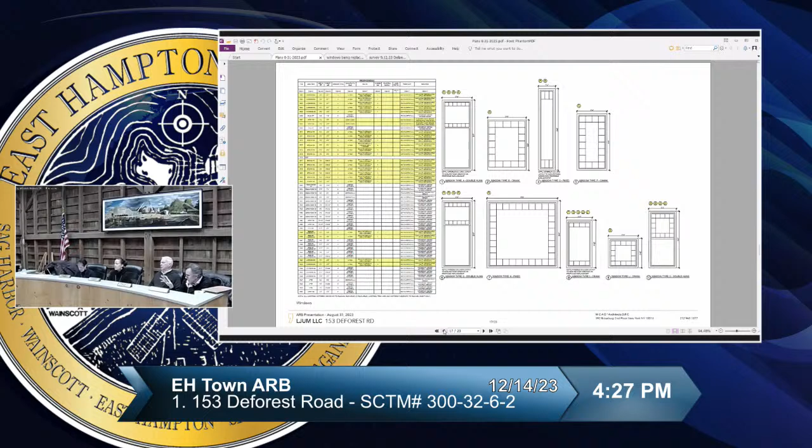Can we just see whether that's both on the McKim and White and the Fleetwood edition, or just on the Fleetwood edition? Certainly on the McKim and White ocean side - no, consistent throughout the whole. How many fixtures are there, Jim? I don't know off the top of my head. I think there's two or three on this.

Probably like 6, but they're not lights that were added - they were replacing things that had been added. Holly Hunt fixtures from Roberta Gossman, who was a New York interior designer.

I have to say the light fixtures are a little bit, to me - everything else is so compatible and fits, and the light fixtures seem to me like more of an art deco somehow element.

I went to Circa in Southampton the other day, which is now called something else, but it's the same company. You can count on your fingers how many historically looking light fixtures are in this huge showroom - they're all like this. You can go online and I'm sure find historic light fixtures, but if you look at what's available in the general marketplace, it's all gone to this more modern look.

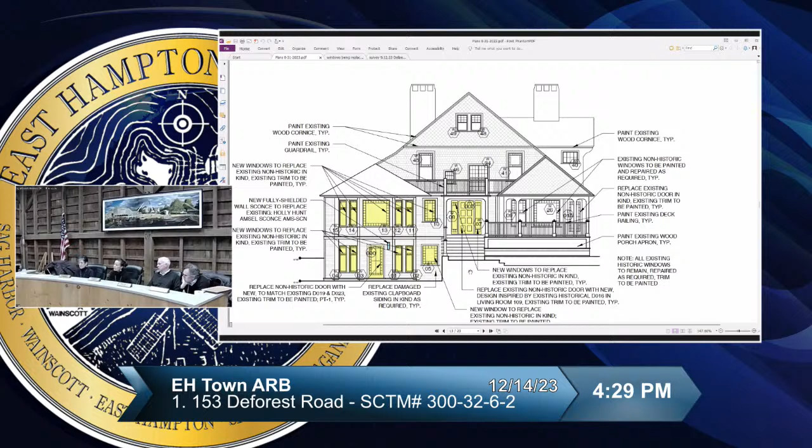And it's dark sky compliant - a normal historic light fixture will probably not be. The fixtures that were on previously, I wish we had photographs, but probably, I'm not sure. I think we could get a photograph.

They were pretty much almost identical. They were made by Roy. We've just said that they were pretty much the same - pre-ARB approval. So we're now past that. Right.

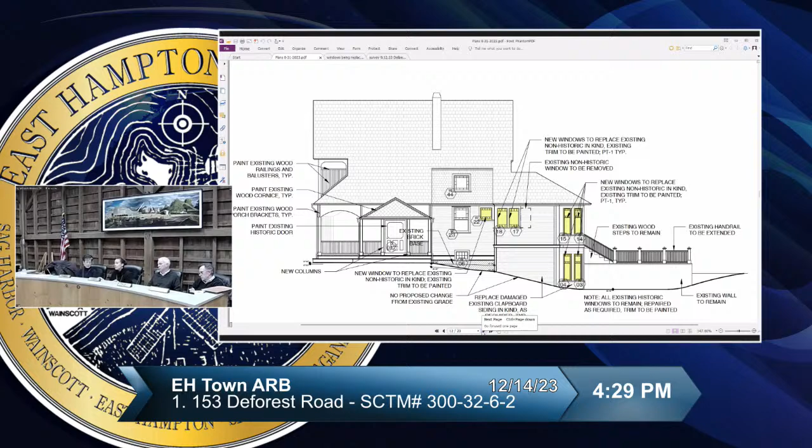Well, you also have to think about when this structure is visible, that the historic district would consider. It's usually not at night, at the end of the day. The lighting here is pretty minimal - it's not flood lighting, just basically accent lighting that allows entrance to the house. I think it's discreet.

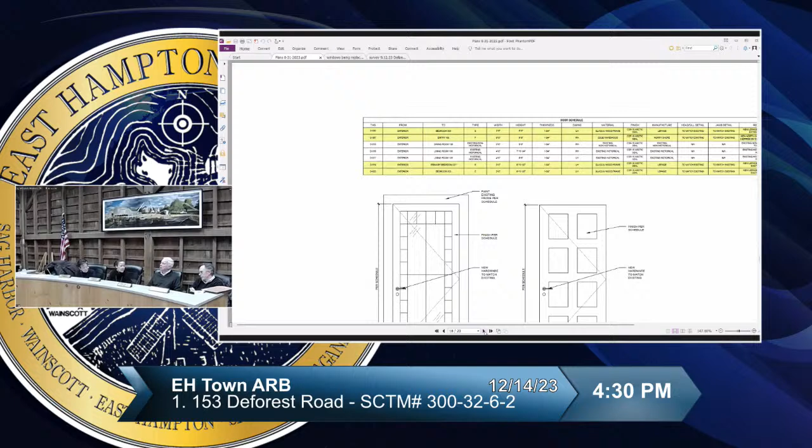I just think this is a really significant property for this town, so every detail should be accounted for. These are white fixtures - no, they're copper, they just look white. Talking about the glass? Yeah, it's frosted glass, like a copper metal with frosted glass.

Well, it's gonna be more subdued than clear glass. I don't know that clear glass could be dark sky compliant, somewhat. I agree with that, but I also kind of think, are we changing the architecture here? There's ornament and then there's architecture.

I don't want to start saying what's appropriate period-wise for a lighting fixture. I don't want to go down that path.

I don't want to get into saying I want to see something just a little bit better. I agree with the point about the frosted or etched glass, but if it's not etched, you're looking at a bare bulb - is that better, is that worse? Then we start talking about dark sky, recessed, period appropriateness.

It's one detail that could be worked on, that's all. But again, I see that point of view - we're not talking about fenestration, massing, or railings. We're talking about a very replaceable piece of ornament, so I'd be willing to give the owner some leeway on this.

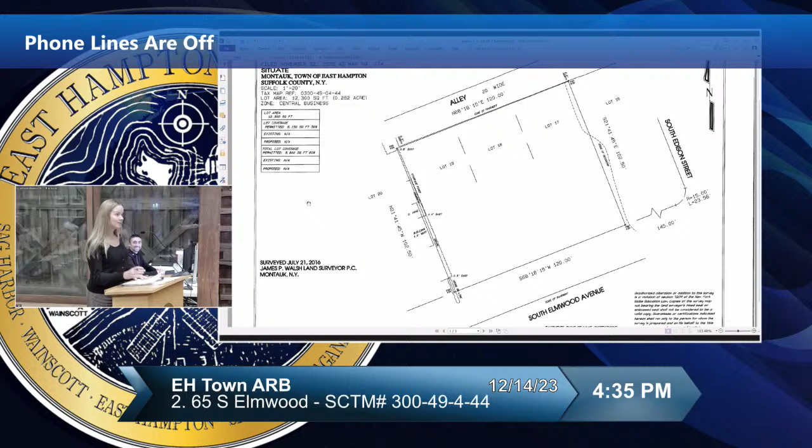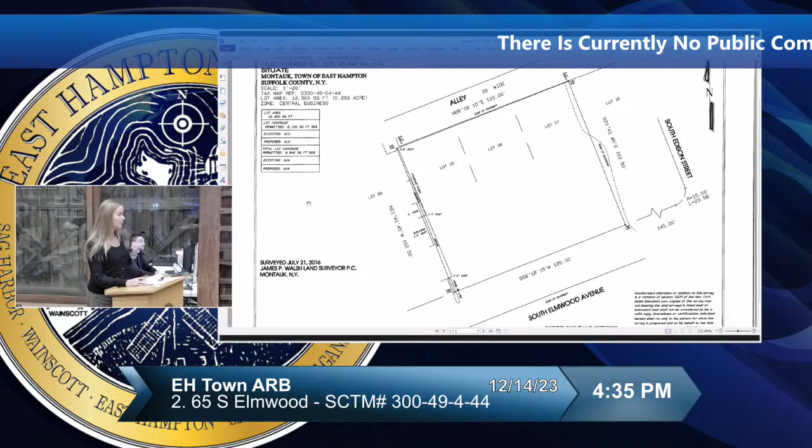As Esperanza said, it's a vacant lot in downtown Montauk, and there's an existing fence along the western property line. It's black and stockade, and it's proposed to be the natural wood fence that was just up on the screen. That's really the full extent of it. It requires site plan and architecture review board because according to the code, it is a structure, and any structure in a commercial district requires a building permit, which triggers your review and planning board review.

The only thing I wanted to add was in that last photo of the site, the planning board had requested as a condition of their approval that we depict the chain link and the posts on the survey. So the survey approved by the planning board will have that on it. If you're inclined to approve the application and want that on your survey, you can make it a condition of your approval, and I can have the same survey for both boards.

Okay, I was going to ask you that because I noticed it wasn't on the survey that I had in my packet.

That's it. I don't really have any other questions, just one actually. So I see that it connects to the adjacent building. Is that going to continue that way, or is it just the fence? Is it the same owner? It is the same owner.

Okay, and honestly, I don't know if they're going to connect it or not. If they are, then we'd have to come to the ARB for that section on the neighboring property. Okay, I see. So can you maybe point out where the property for this empty lot stops and the one next to it starts? Is it in the middle of that fencing?

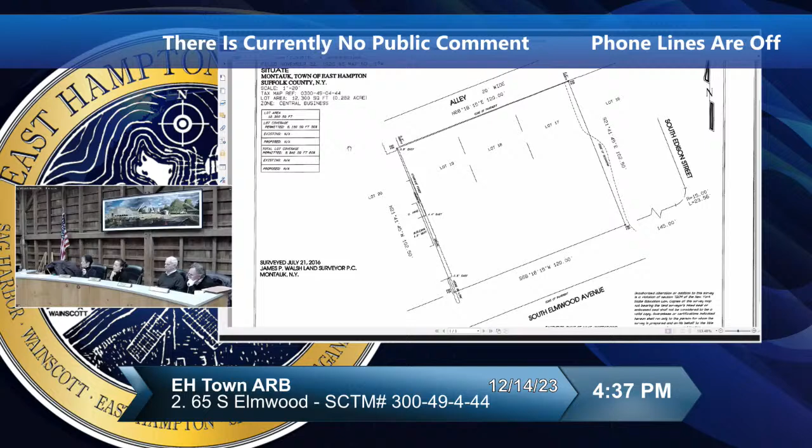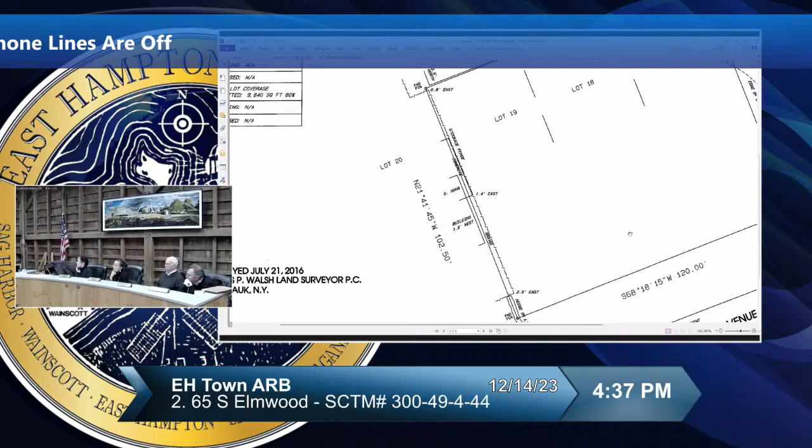It's right, the fence is right on the property line. And then the part that goes in and touches the Montauk Beach House, you can see it here. So it's just inside the property line. It'll come across to right there, just how it is now. And then if we need to replace any fencing on this property, we'll come in for that one.

But do we know that from the photograph? It was just hard to tell from that photograph where, but the dimensions are the same, so it's right about there. And it's the same owner, you said? Well, essentially, it's two different LLCs, but yeah, it's essentially the same owner. And really, the fence is just there to shield the other property.

Okay, could you zoom into this portion? So I thought that your fence went to that corner, and then the solid vertical board fence was the neighboring Montauk Beach House property. Is that accurate? Well, on the survey, it shows as cutting across, so I would say that's not accurate.

Okay, that's what I just understood from what you said, so I just wanted to double check. So essentially right now, we would be approving just the section that is stockade fence. There's another picture we can look at that I think shows it from the east. The whole fence is going to be replaced.

But that portion that was just facing us, that's vertical board, is going to stay that way? The front portion, yes, the front facade, that's going to stay. The portion that's going in between the two properties, the one that depicts the property line essentially, but slightly inside of it, is the one that's changed, the one in sunlight right now.

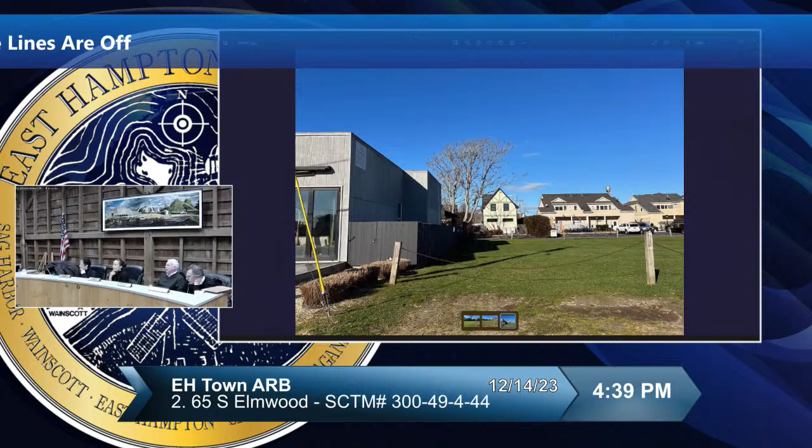I was concerned about the joiner, basically. It joins the property line to a building. It's the one in between the properties that's in a state of disrepair that they want to replace. Right, seems fine to me.

And it's not being painted. It's going to be natural, it's just going to weather. Seems fine to me. In the world of fencing, what they're proposing is an improvement, more expensive than a stockade fence.

Okay, if there's nothing further, I'll make a motion to approve the application as submitted. Can I have a second? Second. All in favor? Aye. Aye. Great, thank you.

Okay, moving on to Marram Montauk, tax map number 300-49-6-26, 21 Ocean View Terrace, Montauk. This is another one I went out to visit, and this is land planning?

This one took me a minute to locate the area the application was referring to, but I found it, facing south toward the ocean in this hotel complex. This is a guest lounge area.

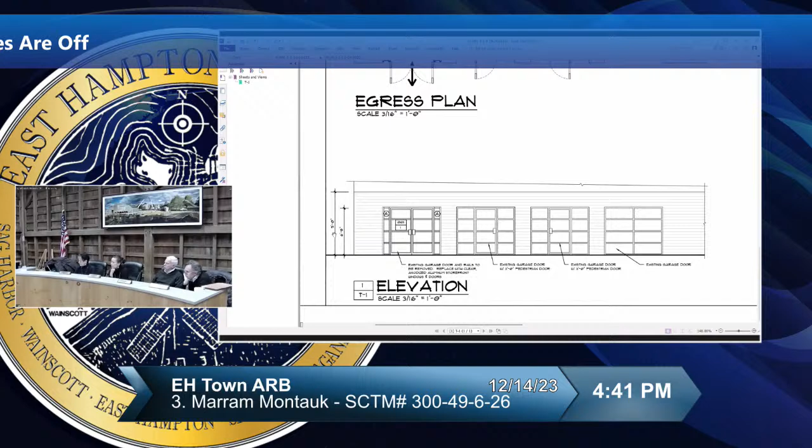I was a little confused because I was seeing storefront windows, but these don't look like necessarily store windows to me. It looks like glass doors with side lights or something like that. So it's basically a door, yes, with fixed panels on either side.

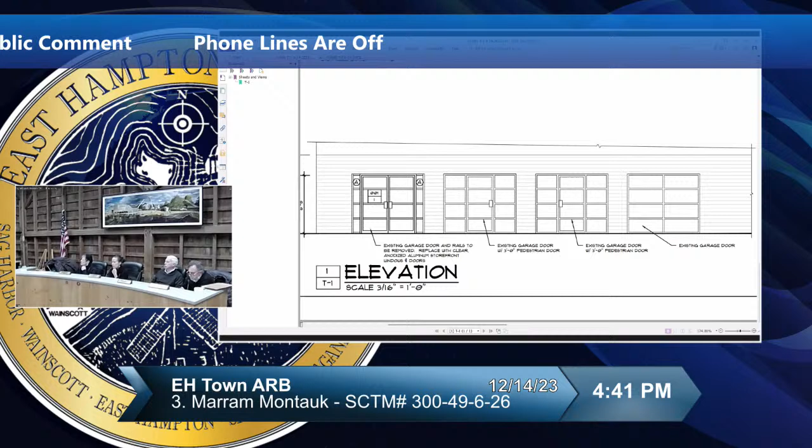And so it's going to mimic the look of the other doors. Yeah, it's just a little different, obviously, because of the side lights, just the design. It's going in the same fashion, proposed in the same style.

And it's just a means of egress. I guess they want to improve the egress for the guest lounge. The guest lounge is something that's with the planning board. Well, this indicated it was a guest lounge. Anyway, we're just here for the garage doors. I'm not reviewing the interior or the use, I'm just saying it appears to be something that improves the egress.

So, any questions? Where is this facing? South, toward the ocean, this courtyard. You can see the pool. Can you see it from the beach? Not really. I have a picture to show. My question is really, can you see it from the public area? There, just behind that wall of the pool, is this area we were looking at. It's pretty hard to see. Yeah, it's sunken.

This is the same window and door manufacturer with the same dimensions of the horizontal and vertical members. Just curious, I'm a newbie, so please be gentle with me. Daniel, maybe put back the elevations in that sheet, which has the specifications. That's correct, I mean, it seems fine to me.

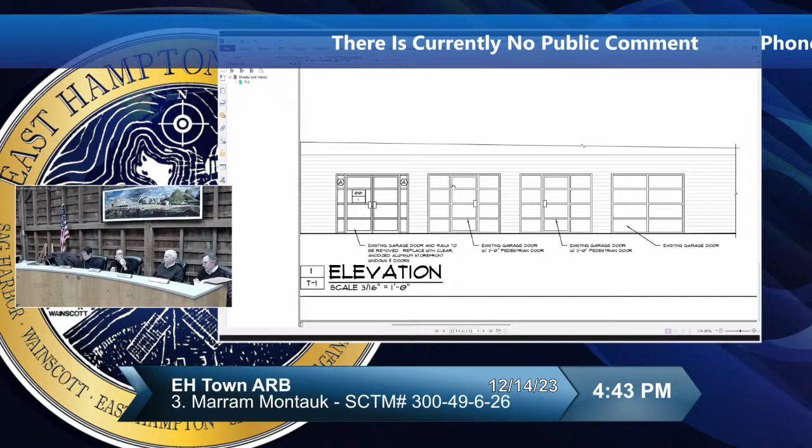The only thing I want to make sure of is that the width of those anodized horizontal members and the door frames would be in kind to what's there now. The risk is the ones on the right are not hurricane impact rated, and then this would have to be beefier and they wouldn't match. So as long as it matches. Okay, I'll make sure that happens.

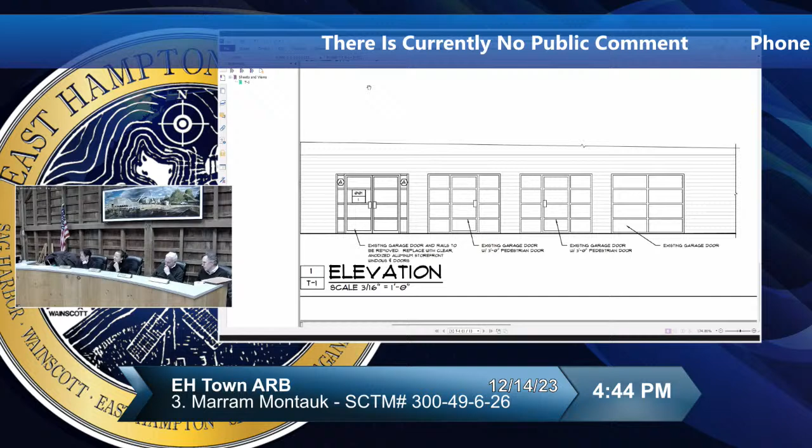Okay, you want to take a look at the specifications on this page? I think it kind of is what it is.

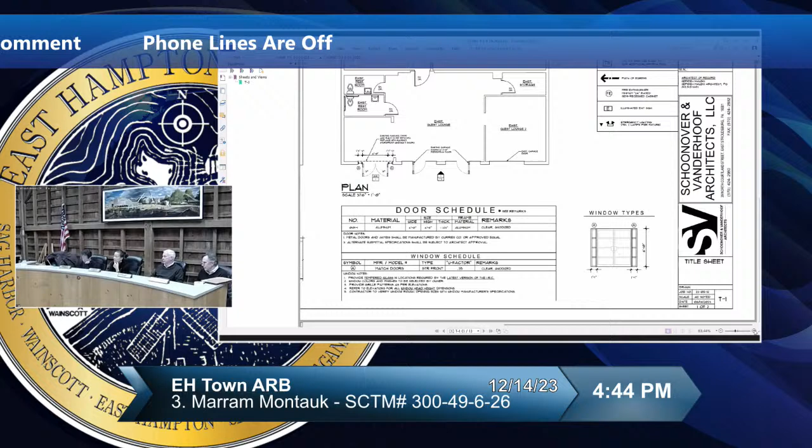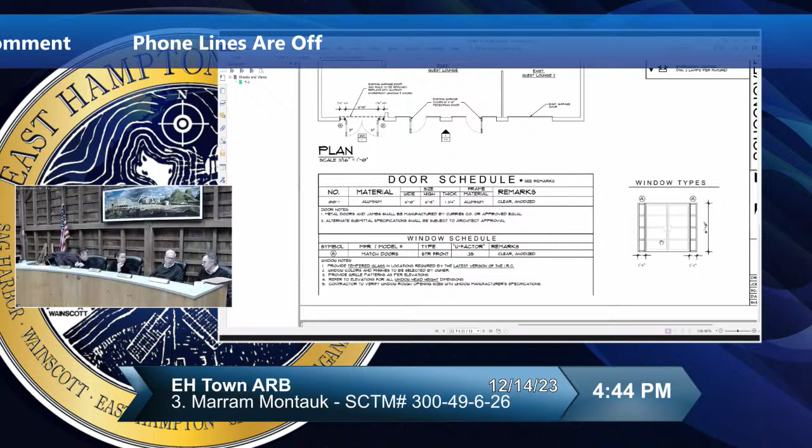It's one of those things you have to leave to the faith of the architect to get the detailing right. I don't typically see that we'd say it matches in kind in terms of materials, but the dimensions - the fenestration lines, widths - have to match up. The profiles should match in dimension. We don't want them to be thicker.

Yeah, I understand what you're saying. But I also understand that sometimes the manufacturer says it's not really available these days, so it's like half an inch less, and then they go back to us. How do you handle that?

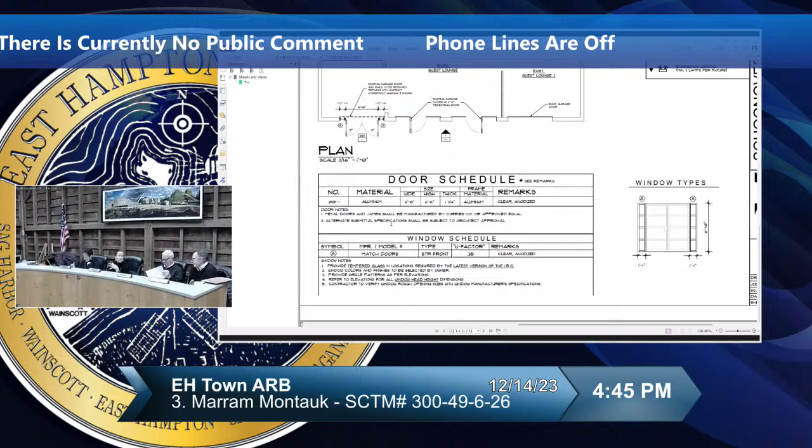Well, I'm willing to approve. It seems like a very well-maintained property, and I think they're going to be careful with that. So I'd be fine approving it in kind.

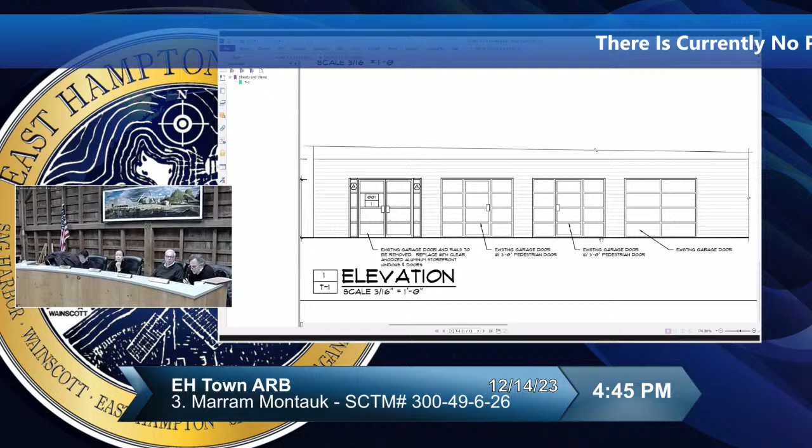Diane, anything else? Okay, all right, so I'll make a motion to approve this application as submitted. Did you want me to make a note of that? I think it's really fine. All right, do I have a second? Second. All in favor? Okay, thank you.

Okay, we had agricultural overlay next on the agenda, and first up is Henry Beard for a modification. This is 62 Hampton Road, tax map number 300-189-4-2.1, in Amagansett. This is Diane.

Yes, hello again. Now, this project has been before us several times, and it began with three changes being made to this building. Two of the new structures have been built, and this is the existing structure. Could you go ahead with the pictures? These two - the tower is the original house, and the other two are the additions that have been built. As you can see, they very much mimic the existing house.

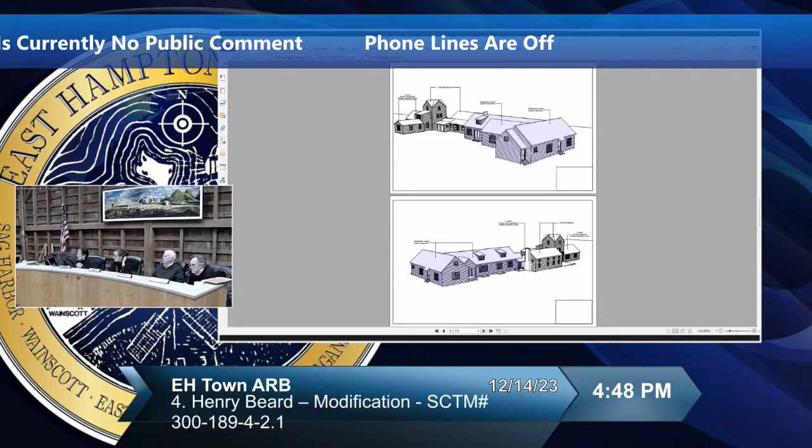Originally we had a 2-story structure back in, I think, fall of '22. We came in front of the board, and there was concern with the scale of that 2-story center portion. So we eliminated that second floor and added it as a 1-story addition off the north side. And then when we did the budget, it came in too expensive - it was a lot more square footage, a lot more construction.

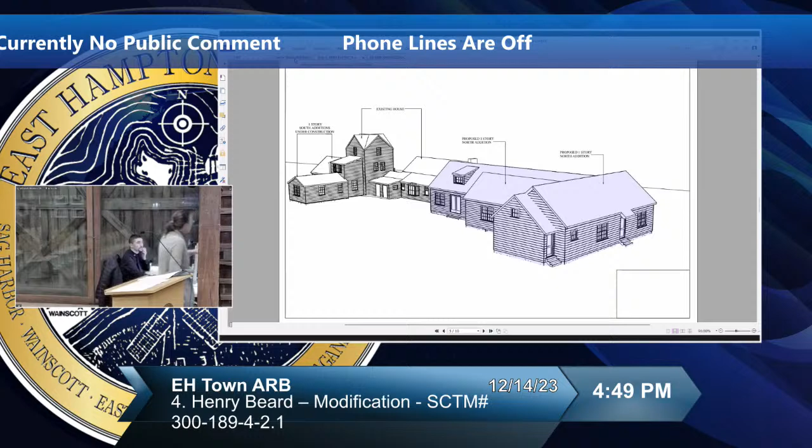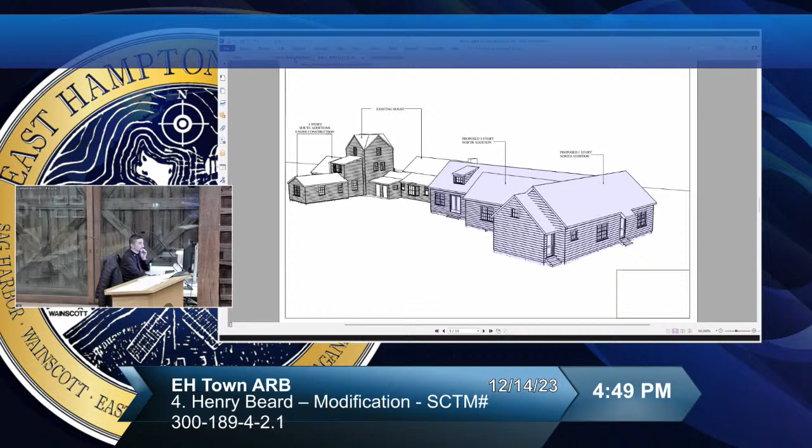So we eliminated that wing and incorporated the bump out - about an 8 by 30 bump out - into that central section, still keeping it 1 story. But we had to increase it a little bit because we had this bedroom suite we had to incorporate into the center section. So the difference is this little bump out here. Before it just came straight across, and then we had this wing that came out. So we've eliminated that, and we end up with 1 dormer in the back.

And then in the front, west elevation, we have 2 dormers. Before, originally, we had 3, because of how we rearranged the internal space.

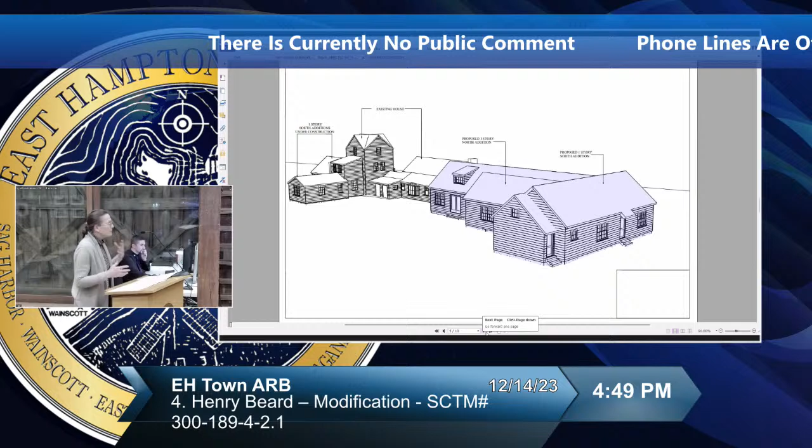Is that how it's going to look when it's finished? Oh yes, hopefully. So everything to the right is new and most everything to the left is old, except for those 2 little protrusions.

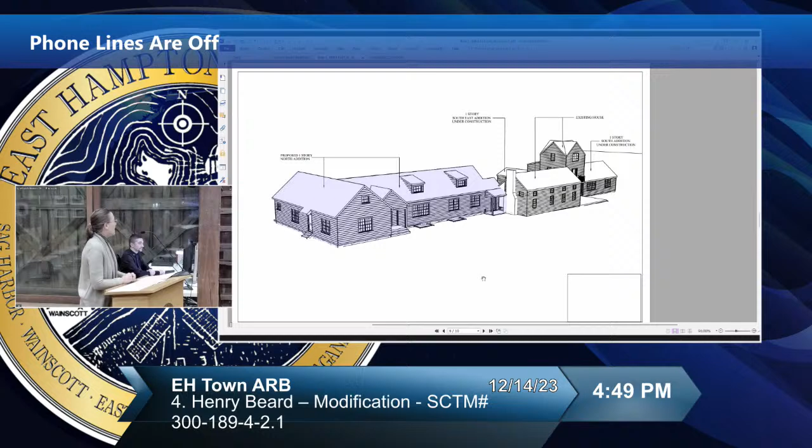This is the existing structure, and this is the tower, and these 2 one-story bedroom additions we had gotten approval for earlier, and they're built. In that wing there's a music studio and living space. Even though they've just been built, they match the house - what kind of materials?

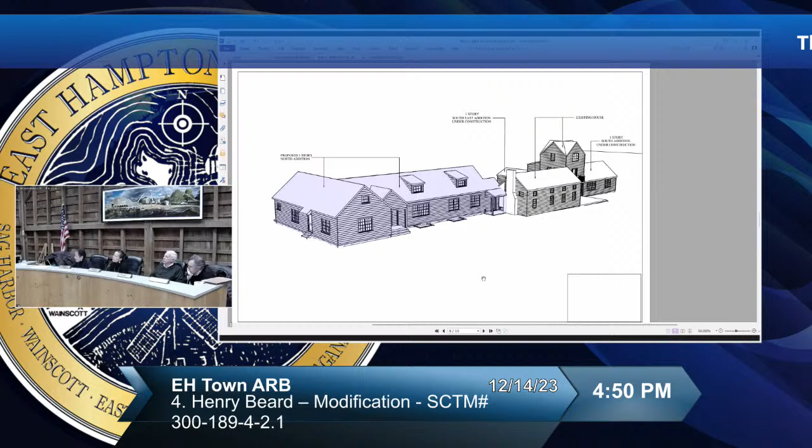Yeah, but the intention was basically to make the new part indistinguishable from the existing house. So I think that we approved something that was much bigger in scope, and now the modification is basically to decrease the space and the fenestrations, et cetera, so if you have any questions.

And that's on the other side of this, right? The bump out side? Yes, behind that central portion. Okay, right, I understand - the 8 by 30 bump out.

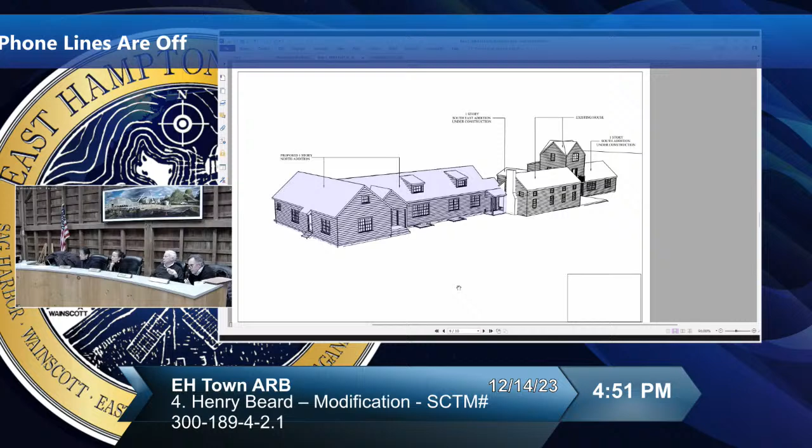I noticed one comment on the last submission was about the entry, and this one seems improved because there's more of a hierarchy now between the left being the main entrance and the right being a secondary entrance, is that correct? Yeah, that's how it reads.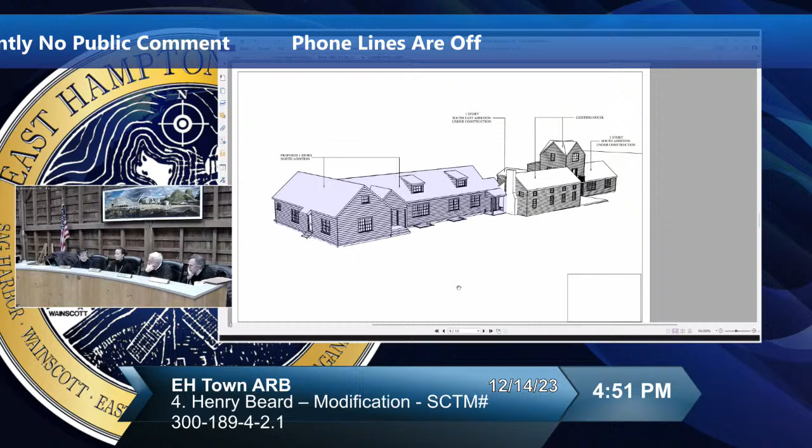It looks like a little village. I like that it's not like any other houses, and it kind of rambles on. Curious what this looks like on the site with the survey. It's a long property and the architecture follows that, it's this long house now that rambles in the direction of the site.

We were able to save a really large oak tree in the back with this new addition. That little bump out is actually a crawl space, which enabled us to preserve the tree. So they've kept the property very rural.

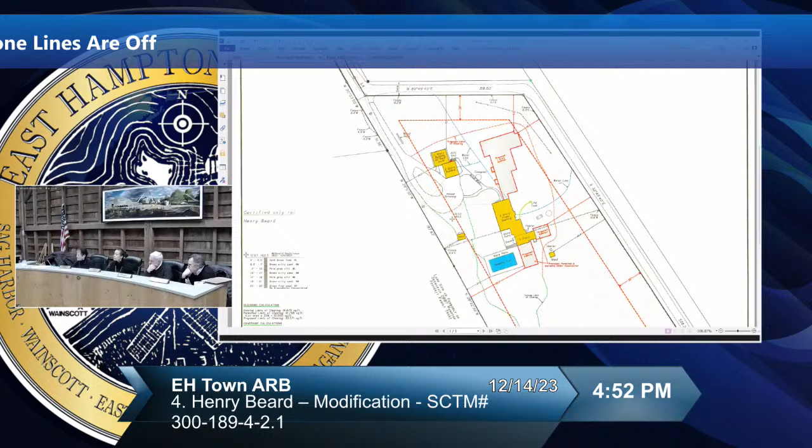It's very natural. Do we have the lighting cut sheets? You're putting sconces on it, and that was already approved, right? That's part of the submission, has that been approved? It was approved already, this is just a modification for this particular addition. So we're basically approving the massing and the fenestration. Okay, seems fine to me.

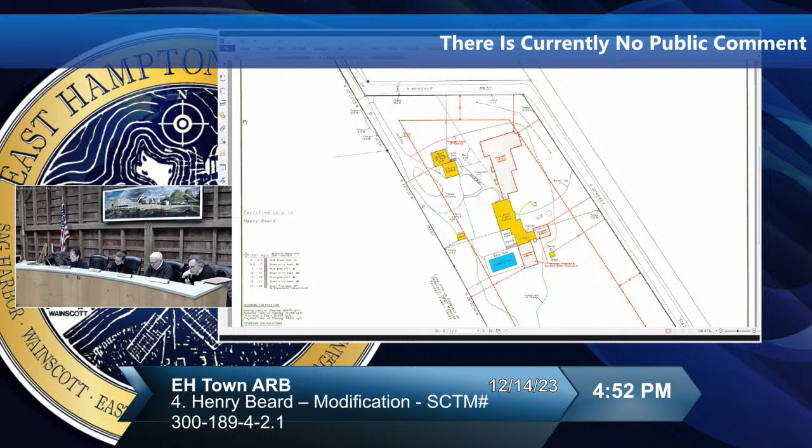So, wonderful. I make a motion to accept this application, these modifications to this application as presented. Second. Thank you very much. Aye.

Before you go, there was one question about the consistency of lot coverage. Oh, that's the next one. This one, we just wanted clarification on the GFA. The GFA is about 14,000 square feet for this property and will be finished, about 6,000 and change.

So we'll need the final GFA for the house for the resolution. I do have it on this. Okay, I didn't update your plan. Can you email that to me tomorrow? Absolutely.

And Daniel, I actually do have a note, the elevations don't reflect the lighting. Yeah, the fixtures weren't on the elevation, we did add those. You added those to the elevation? So I'll also send you that. Okay, so we'll just be sure to have those submitted and reflected in the resolution.

We typically have the height of the addition, height above grade, in the resolution. Yes, we do have that information. Okay, it's not on this set. I have it on the permit set, but I can include it on the set I send you tomorrow. And for reference, it's 19 feet and 1 inch, I think you guys wrote that in the application. Okay, good, great.

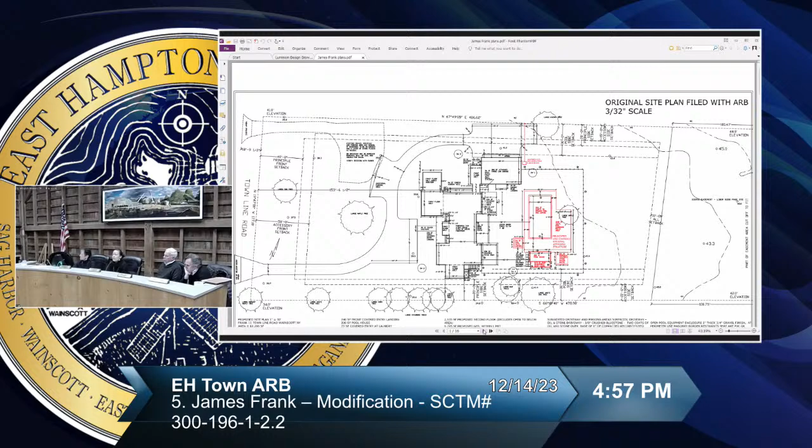So when we walk through, it would be most helpful for me if on the photographs you could point out, say, this is approved, or this is what we're proposing. Do you want to do that on the photographs or on the elevations? Because the elevations have the approved and the existing. Let's start with the elevations.

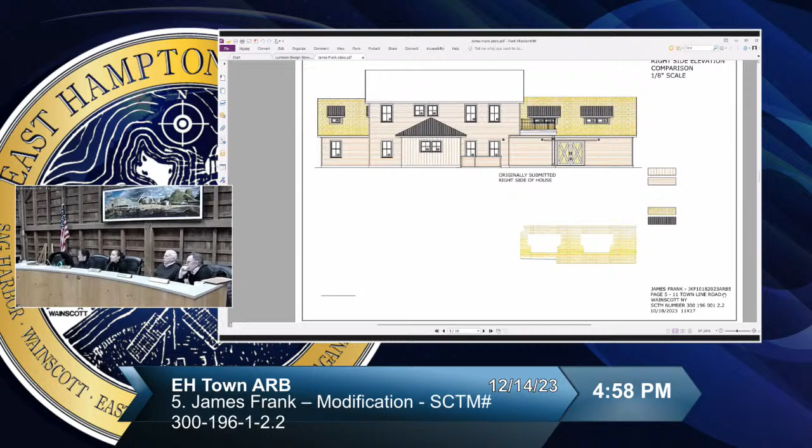Is it vertical or horizontal siding? There's a little bit of both. We actually brought samples of the materials as well, showing what was approved and what was installed.

Where is the site? Is it visible? Yes, it is. Is it across from the barbecue place? It's just down the road from there, on the other side. It's definitely visible as you drive east. You have the big farm field and Town Line Barbecue, and it's just past Town Line Barbecue if you go through the vista there.

All right, keep going. So the siding was changed, and then there were some fenestration changes as well as the balconies and railings, which were changed from cable railings to glass. I think that's it for this page.

So I'm looking at the cable railing - was this as submitted and approved, or as built? The top is approved, as built is below. Oh okay, so I did it on each elevation to try to keep it clear. Very helpful, thank you. So the glass is on the second story, really, not on the lower stories.

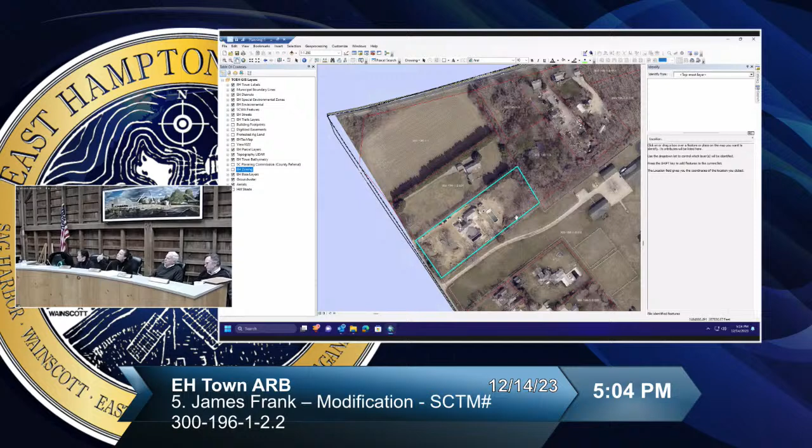Thank you, Daniel, so that's the property. And where's 27? North of here. So there's a farm field at the corner, and town line would be just opposite that farm field, Town Line Barbecue. So it's two houses really, if you take - yeah, you can see it.

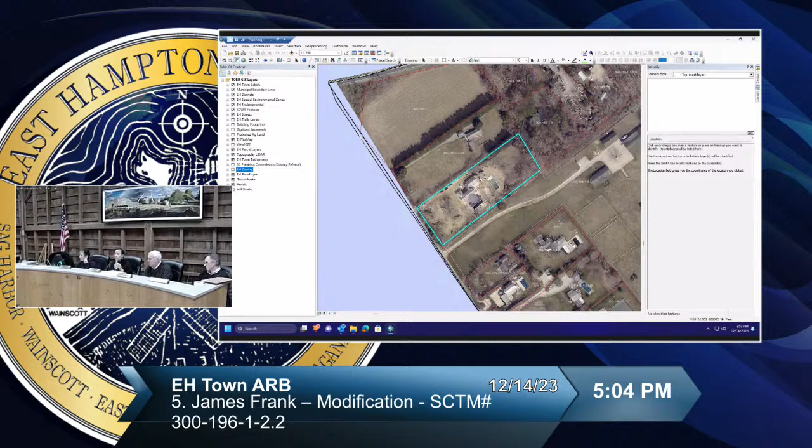Can you see the side of this house from 27? No, really? There's a huge evergreen hedge, it's huge. And the owner just decided to make these changes because he or she felt like it, or what was the reason? I have a whole explanation, I can get into that.

Did we cover all of the facades then? Let's just go back, I want to see the visibility. So that one is facing the backyard, so it's east, which is the scenic easement. So is it visible? No, when you see the pictures you'll see it's fairly enclosed.

Keep going. Let's go back, this is the view as seen from the street. It will be fairly visible if you are within Farrell Farm, it's visible from a neighbor. So that's the street we're looking at. And then I'd be curious to know this one - what direction is this facing? North, toward 27.

There's a row of pine trees, right? The neighbor's, or there's something - a neighbor, and then the farm field. But there's no guarantee, trees are temporary. Correct. Okay, should we see the photos?

Are there windows in the new garage door and the existing garage? Those are windows, yeah, there's just slivers of windows. Go back - yeah, so this is like the front facade.

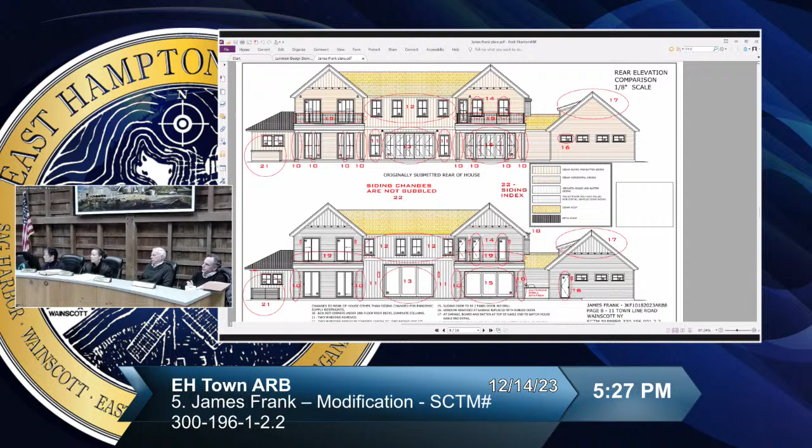You look at the photo - what do we do? The photograph is worse. Yeah, one other detail I should point out is the covered porch areas, the columns were squared off, so they're much more solid than they were originally proposed. That was one other detail - they were more slender in the face, there would be a fascia wrapping around it.

But I don't think that completely would have agreed with you. I don't think that would - I think you're right with the columns, that would have been approved. This is just massive. I do know structurally those columns are not that big to support a roof overhang like that. It's just done to fill it out.

Let's go to the next elevation just to check that. Oh, is that one? Sure, right. So this is the back of the garage. So you see this, the barn door that's there. This is what confuses me about those garage doors, because I find there's a farmhouse style to this that then is not repeated on the other side of the elevation. Really inconsistent.

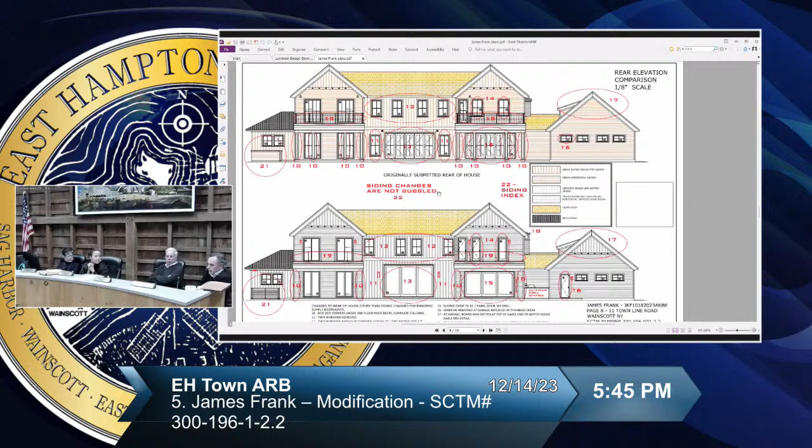So when I learned from Trevor that your board meetings are public and on YouTube, I started watching them, certainly mine. And in fairness, at the end of either the first or second one, it might have been Chip, he was saying that you can't just make changes willy-nilly, and he said to my architect, you have to go tell your owners to stop pushing you around and making changes without getting approval.

But he never came back to us and raised the red flag. He said don't worry, it won't be a problem. I'll give you a great example, and the reason why Rick, my builder, is here—because the story is so unbelievable to me that the truth here is almost unbelievable.

So my architect said at the end of the last meeting with you, he said, oh, I'll make the changes and highlight it. And Kathy said, no, I want you to bubble it. And he said, no, I'll highlight it. And she said, please bubble it. And he said, no, it'll be too confusing for you. I don't know if you remember or not—I've watched this video 50 times.

To give an example of the architect's naivety to the importance of this board, he said to you upon leaving, well, if I make these changes and submit it to you on Wednesday - this was a Thursday meeting - can I get on the next board and get it approved? So in his mind, and I'm not here to blame anybody but myself, I'm responsible. But he never came back. In his mind, it was always going to be these modifications.

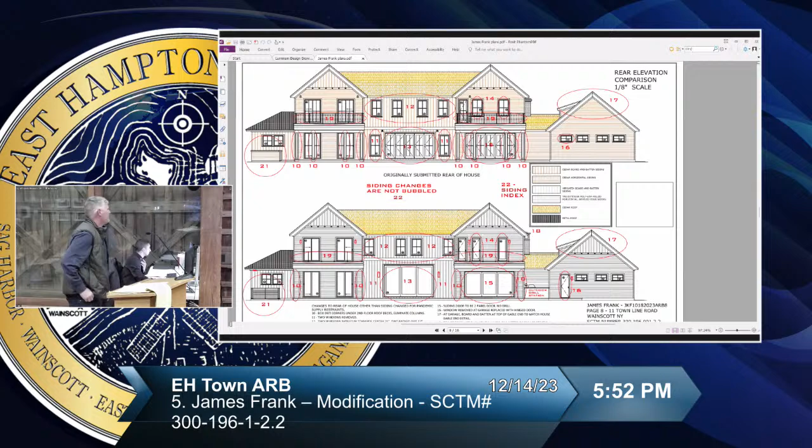So there's screens that pull down? Yeah, if you go back to the picture, they're motorized. A Centor screen or something. You could almost see the track, on the other side. Yeah, you can just see there's a track. It's very thin, flush with the siding.

The screen rolls up at the top and comes down on three sides. That's the reason why the back facade wasn't, once again, it was almost a point of, it's okay, it's the back of the house.

I hate to say this, but I think Esperanza, you need to look at what that looks like down. I mean, presumably these are like invisible screens? They're a regular vinyl gray or charcoal color screen, just has a white hem bar at the bottom about 2 inches. When you say screen, is it solid or a mesh? Yeah, it's a black mesh. So it becomes mesh, like a screened-in porch. Yeah, correct, I see, okay.

But it's on a roller. Yes, it's a motorized roller, not fixed in place. I think you'll notice that, going back, my concern is that when they're down, it's gonna look black. I don't know if it rolls on the outside technically. I don't know what the opacity of those screens are. I know this is sounding nitpicky, but if it comes down and looks like a black privacy screen, then...

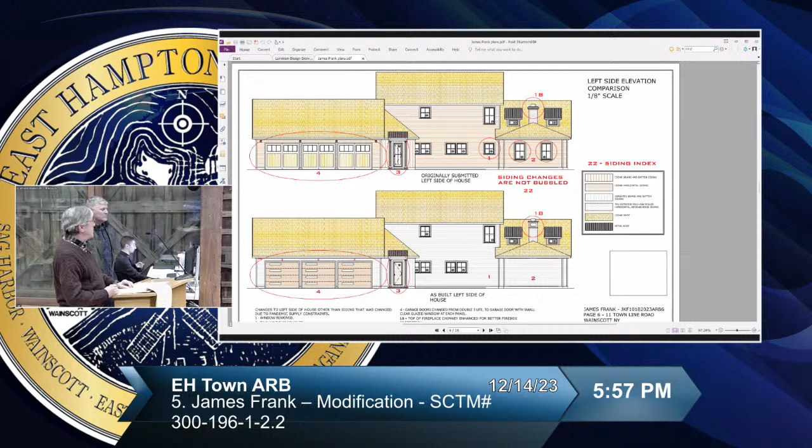I think you got to give in on that because we have to have some give and take here, and we got to wrap this up. As I said to you, I need to wrap this up with you guys. I created... okay, so what else?

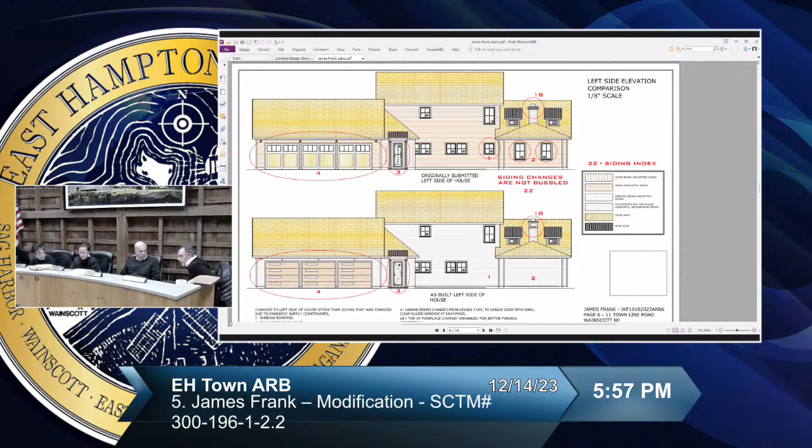I also want to say in terms of process, I know we want to wrap it up tonight and we're not going to drag this out anymore. We obviously have to talk about it, but from an ARB standpoint, it's like you either build what's above, if we're not going to do that, or you have to come back with some drawings to us, which I am just letting you know.

Frank, you're referring to the garage doors? The garage doors. If you tell me that you'll accept the old doors, I'll spend a fair amount of money, take these doors, throw them away, and put on what was originally approved. My preference would be to paint it black - it saves me throwing out good garage doors.

And listening and respecting your concern that these doors are a little different than the rest of the look of the house, which I understand you're thinking. I mean, personally, I don't know about black garage doors, to be honest. No, I'm not a fan, because the house on Beach Lane has the two black garage doors.

I think the doors need to be white if the house is white. You don't want these things to scream for any reason. So if these were painted white, you would be fine with that? No, if the original doors painted white were installed, I'd be fine with that. So would we just ask for some specifications of the originals? We must have the specifications.

The issue I have with painting those, what you have installed, white, is I don't like it - it's not going to change, you're going to notice the design of it. Yeah, it's the design. So I think the board is unanimous that the garage doors need to be changed. That's number one, or that's one thing. Okay, what's number two?

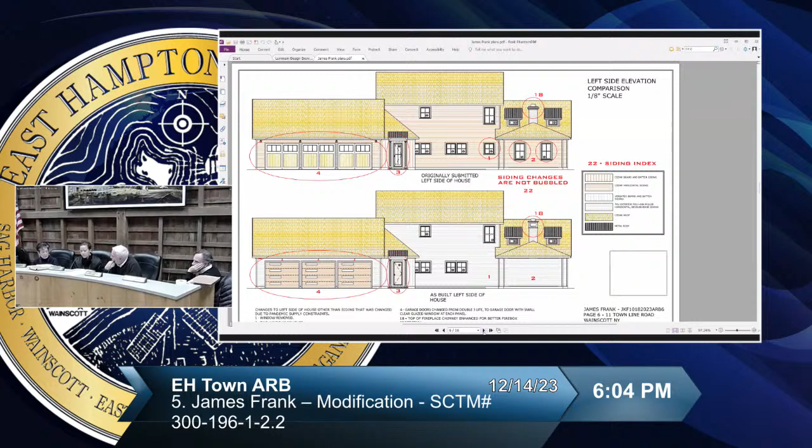I'm really sympathetic to your plight, but it'll make a difference, it will make a big difference. We're not asking for structural changes. We're not asking to raise the height and all of a sudden where you've got some LVL header where you've got to reframe and do everything.

Let me just ask the builder, so are there any - and also with the columns, I realize we're not asking you to reestablish the column pattern, which would mean if you put in the two columns that are right now blocking those doors, you would have had to rip up the whole terrace and change your foundation. We're not asking for that. So get back to my question.

So if you were to make that sliding unit - I'm not asking for it to be wider, but maybe see how it proportionally worked better for you to increase it by a foot, but lower. Is there a structural column right up against it?

Yeah, I think there is a column to the right and left of that. Okay, well then just lower come back to us with that.

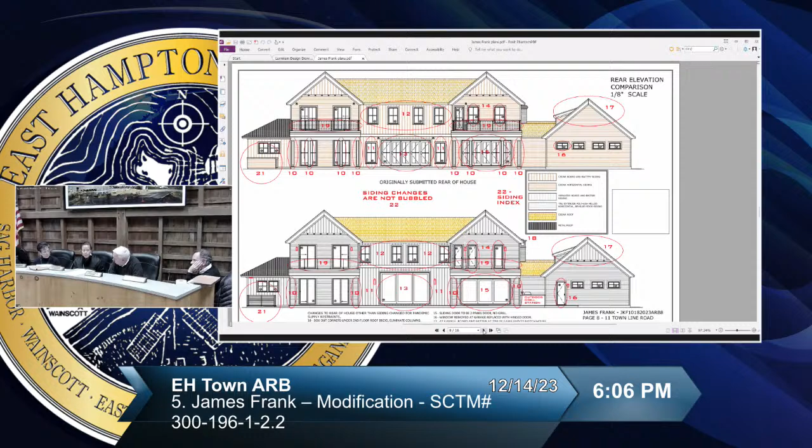So the last issue is the pool house. Esperanza, your view? Because you've been there and seen it. Yeah, I mean, I think that had we really had the chance to review that, I'm not sure the relocation as it is existing would have been approved. I can't speak for the entire board. But does he need to deal with it now? I think it's built, I can't, it's too far gone.

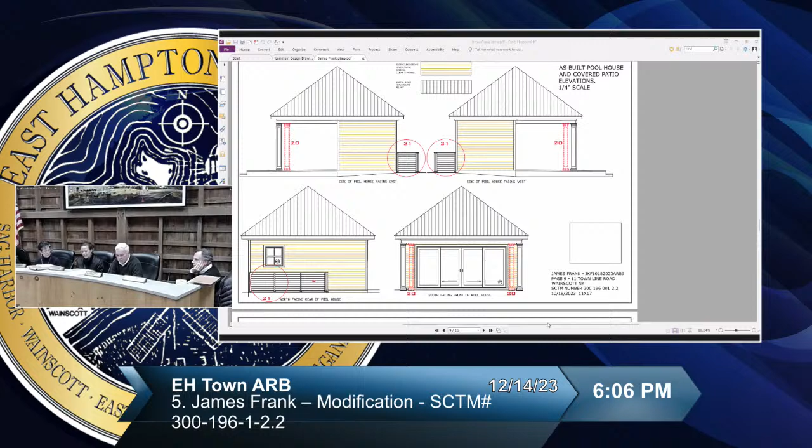What's to the south of the lot? So we know it's on the north. It's Farrell Farm, it's a farm. Diane, what's your view on the pool house? It's a horse farm.

I would love to actually see it with my own eyes, you know. And it doesn't have the doors or anything there as yet. As Mr. Frank indicated, they hadn't put their sliders that go in there, correct? Correct.

I don't mean to jump Diane, but I like what she was saying, but we haven't talked about whether we'd want it painted. Well, do we want it at all? Let's just deal with, do we want it at all? Does he have to move it or tear it down, or can it stay where it is? That's really the issue. This has a basement and everything. Yeah, I think it's such a massive thing. It stays. It has to stay.

Okay, Frank, without going to the site, I think I'm fine with it because if there's a farm that's like an open field, it's actually backing away from the farm. So in terms of its massing, its location, can we just look at the survey?

Diane, what was your view? It's hard for you, without going to the site as well, but I think, I mean, I agree with Esperanza.

Okay, so then the real issues are the sliding glass door in the center, the back facade, and the garage doors. Is there anything else we've got to deal with? Because we've been on this for an hour. Yeah, it does kind of merit it, it's a lot of changes, and I knew it would be a long process, as it has been already.

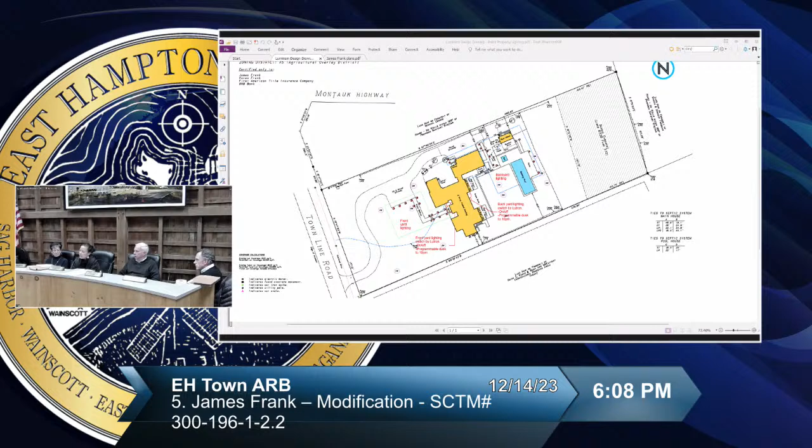When I was there, I noticed there's irrigation there. Yes, and it's temporary, above ground, yeah. You also planted in the far corner? Three trees, northeast corner. Yeah, because there's a tangle and a mess behind me. You don't like the tangle and the mess? We're in the country. I sort of liked it, but not everybody liked it. So the idea was if you put up a few of those and they grew, you'd...

Well, it's a bit of a problem because I don't believe you're meant to plant in the scenic easement. It's meant to stay in its natural state. Daniel here can better speak to that, or counsel, but what was suggested, we had an earlier discussion about this, is perhaps we would get Natural Resources to pay a visit and evaluate that area. I would say removing those trees is not an issue at all.

I would like to say, so if your advice is to remove those four trees that I put in that created a little shielding back there, because it's not appropriate on the scenic easement, I'm happy to remove those trees. Okay, well, I think I would prefer to hand that over to Natural Resources or to the planning department. I'm happy to remove the trees. Okay, they may be fine, I think that's the best. I just wanted to schedule with Mark Abramson to go. That's easy, that's the best, I think, just see what he says first. Sure, okay, we just don't want to disturb topsoil unnecessarily.

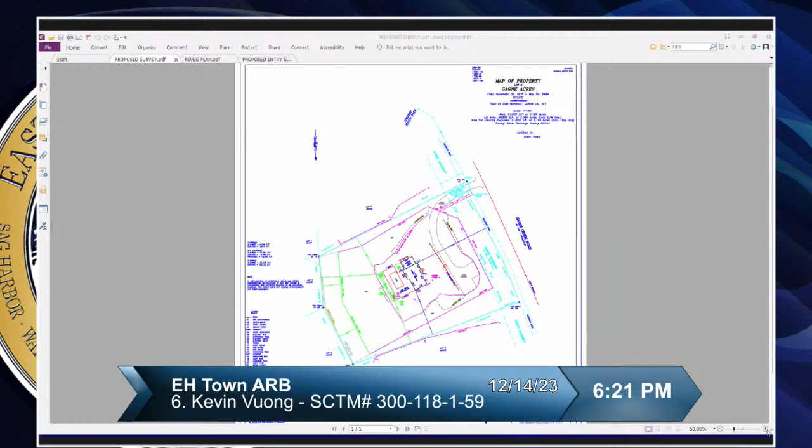And when we were discussing this, the issue of the driveway gate also came up, which is a solid driveway gate. I didn't visit the site again because I assume nothing has changed. No.

So we're dealing with the driveway gate and the fencing, and you have submitted a proposal for a different driveway gate design. Yes, which is at 5 feet 10 inches.

And let me go to that piece. And then that would attach to the fencing along the front, would also be 7 feet? Yeah, you could see it in the elevation where the higher portion is the deer fence.

Yes, but since the driveway gate is 5 feet 10 inches, it was hard to appreciate whether the deer fencing was also then going to be what you proposed originally, which was the 7 feet 6 inch, 7.5 feet. Yes, it is, okay.

And this is along the street side, obviously. The driveway gate is a little bit on an angle. There's a scenic easement, about a 40-foot deep scenic easement, I think. Oh, here it is right in front of me.

40-foot deep scenic easement. Where's the gate? And there's a reserve area. And the gate is - can you blow that up? Zoom in on the driveway gate.

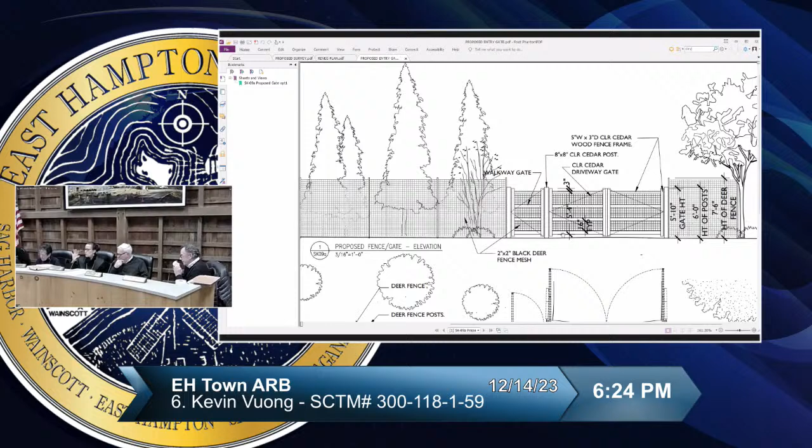Because I guess there was a question that you had planted a bunch of trees in the back, towards the back. The fencing was going to enclose the new trees, but I'm now proposing - because I think one of the comments from the last meeting was that you wanted me to move the deer fence off of the property line, not to enclose the entire property.

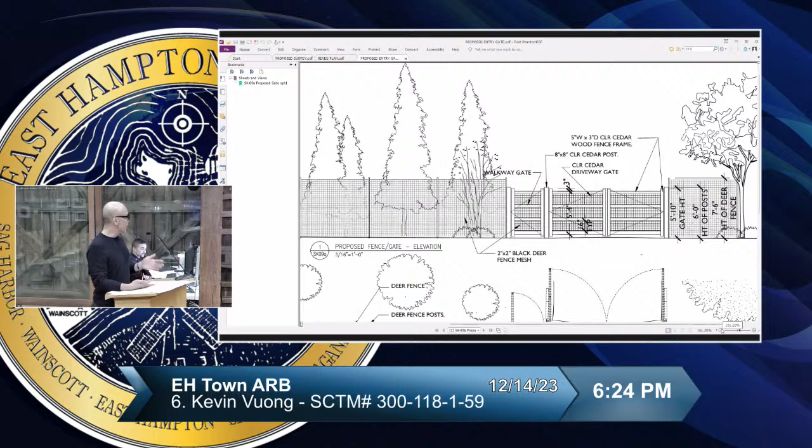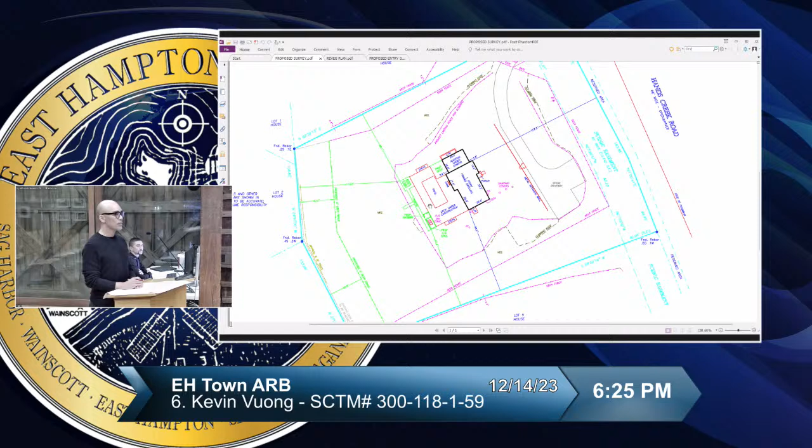This is the front driveway gate. You revegetate the area, and the mulch used is leaves or pine needles.

So what's the project limiting fence for clearing? Is that the second fence inside, for the addition that's occurring at this time? Okay, so that's for temporary construction. Yeah, temporary.

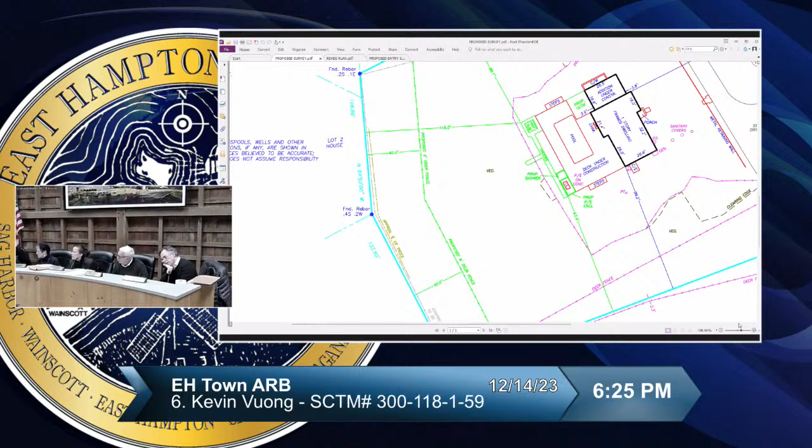Okay, so you're going to bring the rear yard fencing in 40 feet, as depicted on the survey we're looking at on the screen. Can you zoom in a bit, please? Thank you. So that's the green line.

Okay, and then it follows along the purple line to the front, right to the scenic easement, here's the road, and then it connects to the fence, to the gate, and then up, away from the... how far is the scenic easement?

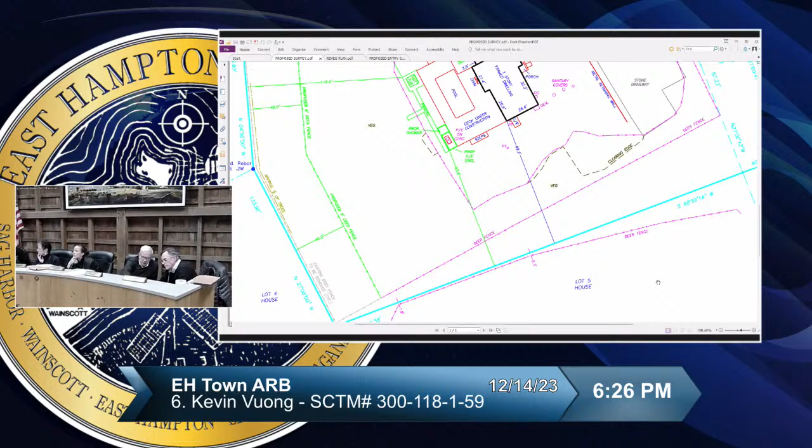Can I see the lower portion of the survey? It's 40 feet from the street. Okay, good. So you're leaving some sections of your property open. Correct. Great, good.

So the real consideration here is that you'd have 7.5-foot deer fencing facing Hands Creek Road. It's 40 feet back, so there's a wooded area in front of it, left really natural, and it's mesh fence.

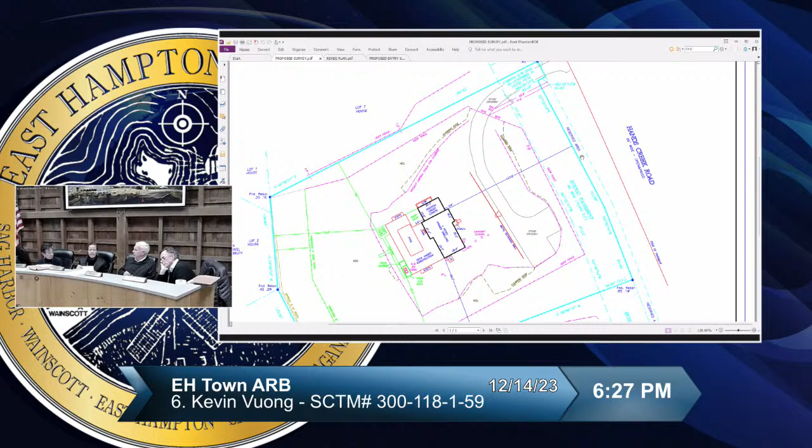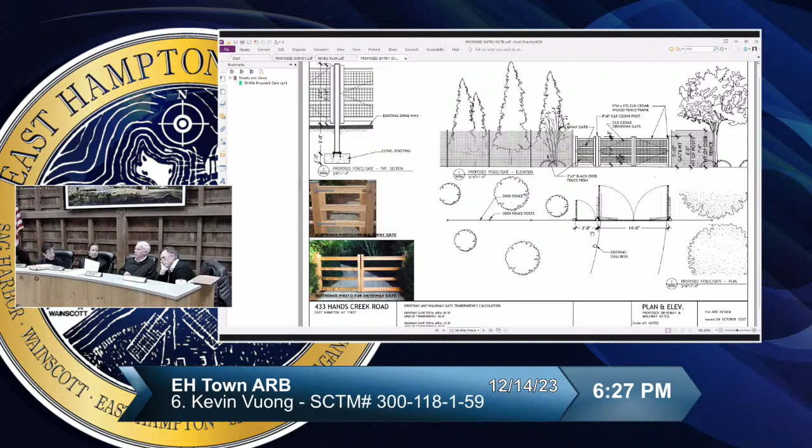And then a 5-foot 10-inch gate, almost as big. No, this is what is now being proposed. The existing driveway gate is taller and solid. The existing one is about 7 feet 6 inches, quite tall.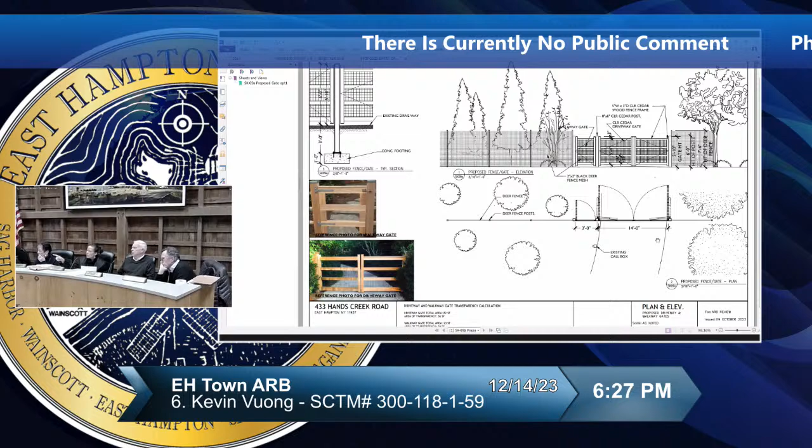And what is the material of the deer fence? It's wire mesh. And the material of the gate is wood? It's the cedar that you're seeing there. Okay, so it's cedar with mesh.

Oh, that's what those little hatch marks are, yes, with mesh in between, so it kind of matches the deer fence. Okay, all right, so it's more rural, much better than what is there.

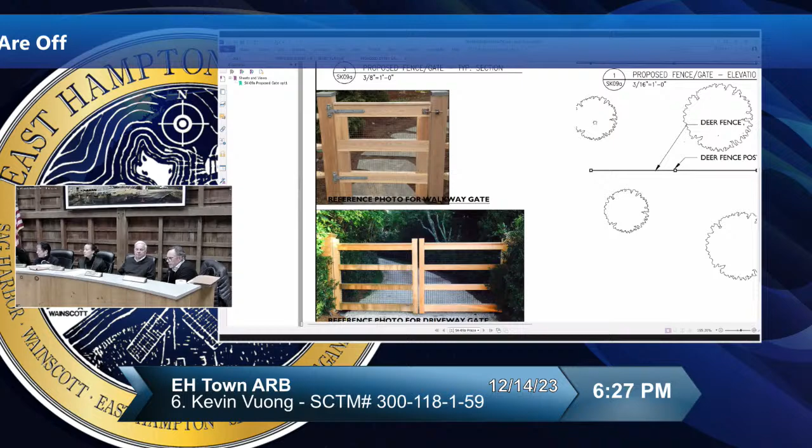Much nicer. It seems pretty far from the street, is it not? I mean, it's visible, but by the time—if the scenic easement is 40 feet, the driveway gate is actually probably anywhere between 40 and 60. I think the survey says there's something like 77 feet from the property line.

The gate is 77 feet from the property line, which means it's further from the street. Yeah, so it is fairly far back, and I think it's fine. With the new design, I think it's much better.

Would you like a lower gate? Always, but you're trying to keep animals out, like everyone else in this town.

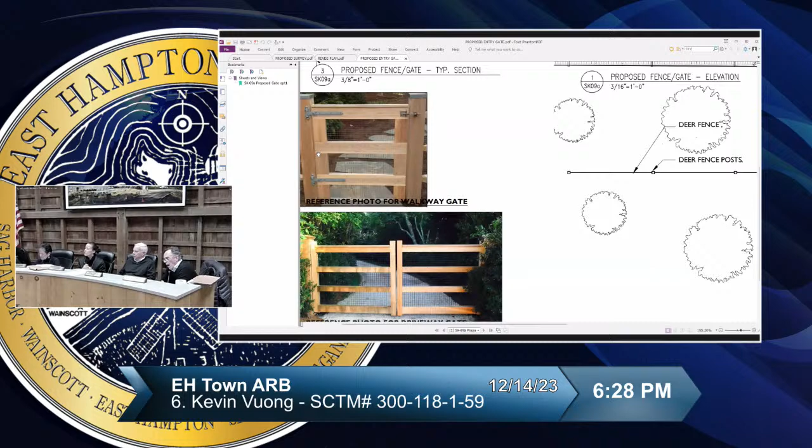I think we're fine. The depiction of the walkway gate shows the existing driveway gate has the pedestrian gate just to the left of it. If you go back to the elevation, you can see it—just to the left if you're looking from the street, that little gate there. So it's a continuum of three gates.

Good, and so the design would look like this drawing, not the picture depicted, which showed slats a bit wider on the pedestrian gate. It'll match—the slats of the pedestrian gate will match, so it looks seamless.

It has a call box. It's all within the property.

Is it operable, or are you going to walk down the driveway every time someone hits the call box? No, it's automatic—it's electric.

Okay, all right, Mr. Vuong, you're catching me in a good mood. Well, it's almost Christmas.

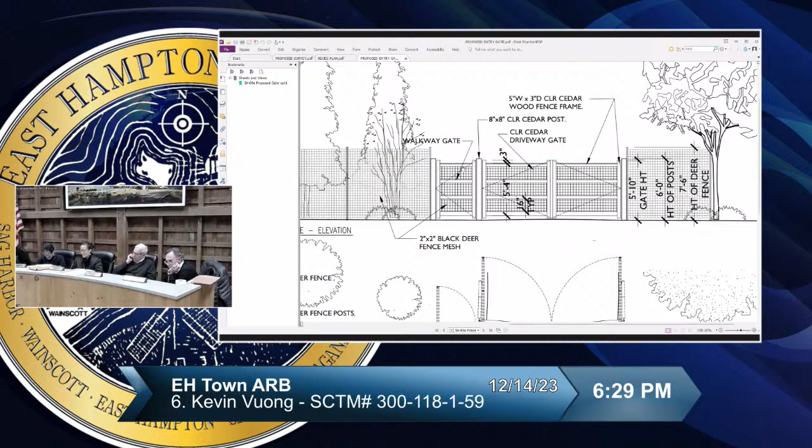Happy holidays to you. I make a motion to approve the application as presented. Second. All in favor? Aye. Thank you, you're on your way. Thank you for coming back with us.

All right, next is Elizabeth Marie O'Neill. Tax map number 300-39-2-19, 64 Kings Point Road in Springs, East Hampton, and this is yours, Frank.

This is an application for approving an as-built fence and gate for the property in the Clearwater section of Springs on Clearwater Road. My understanding from the applicant's letter is that when they purchased this property, this was a pre-existing fence and gate, but it had not been approved. If you go through the photos, the survey will show that the property is surrounded on all sides by a 6-foot stockade fence and a 6-foot gate, and it also juts in a little bit at the driveway.

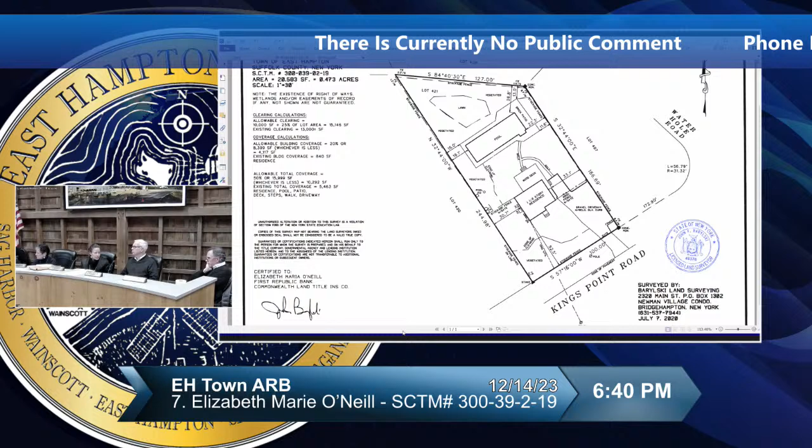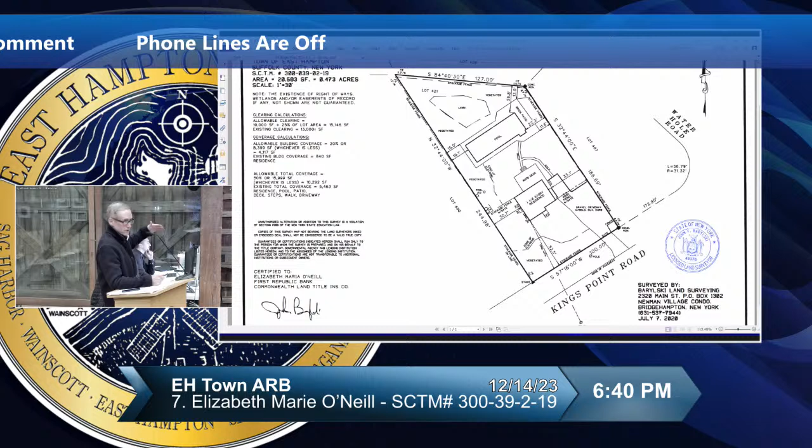My understanding, I thought it might need our approval, but no, not at 6 feet. If it's 6 feet in the required front yard, which is 30 feet in this case for accessory structures, then yes, if it's 6 feet. If it's beyond that, then no. If it's even anywhere northward of that line - that's right, that's right - you don't have to, it's not your jurisdiction.

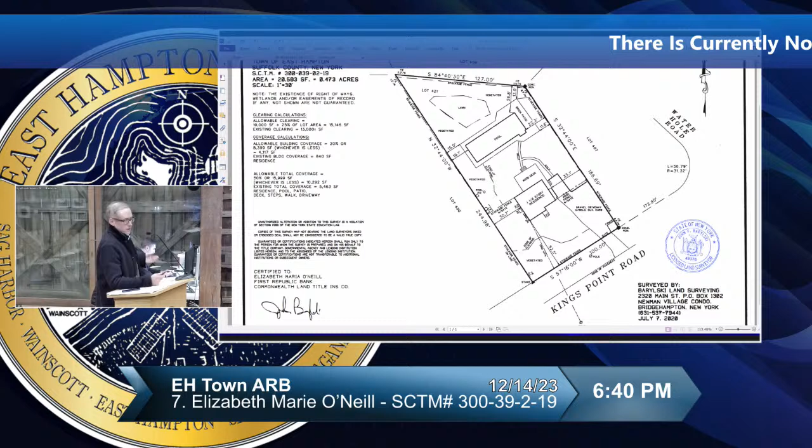So they could build a 6-foot fence an inch behind the front of the house? Not even, no, closer. No, he's saying within 30 feet of the front property line, across and shielding the whole house in a 6-foot fence. Oh, I don't think so. I don't think that's permissible.

Bottom line, I'd be willing to entertain 6 feet of that fence if it weren't as of right. If the owner needs approval for 6 feet, or to go above 4 feet there, I'd be willing to entertain it, that the fence would return at 6 feet back to the house.

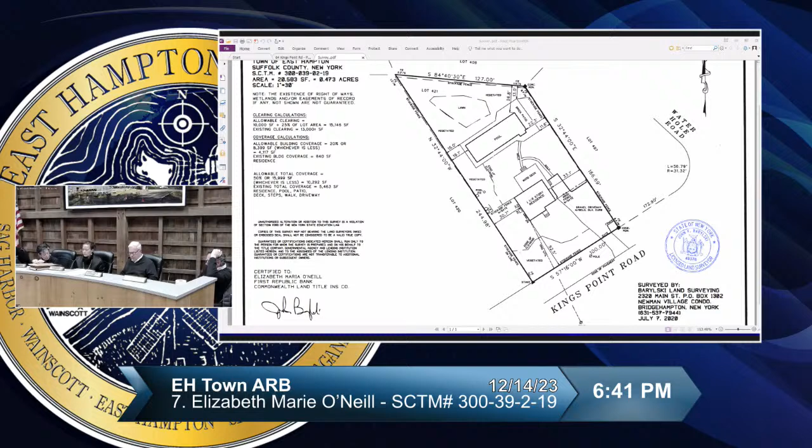I'm only asking for 5 inches of posts above what's as of right for that fence on the inside. Why do the posts have to be so much taller? It's just the design. I can show you some photographs if you like.

Let's just go back to the photograph. I didn't see that. The picture was confusing, I couldn't appreciate it from the picture.

I don't know if it's relevant, but there are a bunch of signs on the front door. That's a permit for the pool that was built.

We're referring to the solid newer fence portion, which has a baluster. It's 5 feet here at the top, and then this goes up. That's not 5 feet. No, it's in line with the 6-foot stockade fence. No, the solid part I'm talking about - can you visually see that it's as tall as that?

Did you measure that, Dan? I did not go in there and measure it. Oh, there was a picture right there. Go back, Dan, you can see the trailer. It's zooming in - it's got that setback. There's no way that's 5 feet.

Let me show you what I have. Taller than the stockade, exactly. You're saying the solid part is not 5 feet, equivalent to the stockade. The solid part's not 5 feet, it's 5'3". And then the next part, I'm telling you, is over 5 feet.

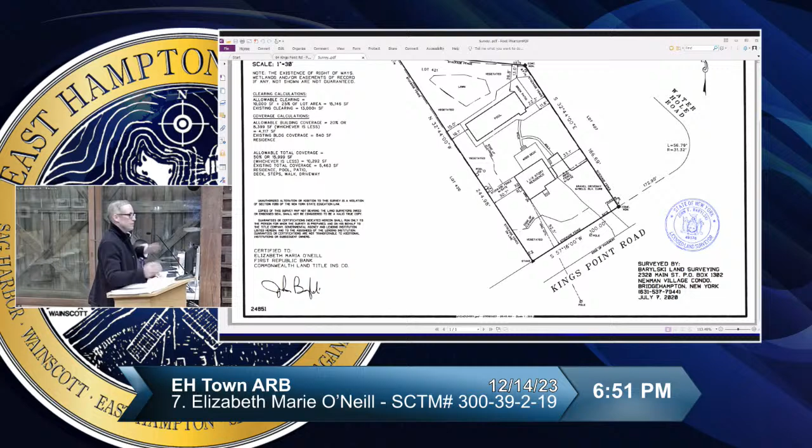So we will grant a builder's allowance of an inch or two on a 6-foot fence because the builder installed it wrong, but you're half a foot over that with your posts and the decorative panel. It's more than that. Listen, this is in the hands of the building department, I'm not in favor of giving you any relief. Me neither. This is in the hands of the building department, you just got to conform with the fence restrictions, so we leave it to the building department.

It's not approved. I don't know if you want a denial or just leave it as incomplete. Well, make the motion again, Frank. I would say that if that's what you're seeking to do, then you should make a motion. No, I think the easiest thing is just to go back and say, well, apparently this is over.

So what are we doing? Are you actually walking out on us? Oh no, I was getting my stuff. I thought you were done. Oh, okay, sorry. You said what you said. Oh, okay, you're not giving me any relief, so what am I gonna do?

I would administratively let you guys handle it. If you want to put it as a denial, make a motion for a denial. That's for you to do, not for them to do. You make the motion, or let's just leave it as incomplete. We're leaving it as incomplete. Second the motion—well, we don't need to make a motion for that, it's incomplete.

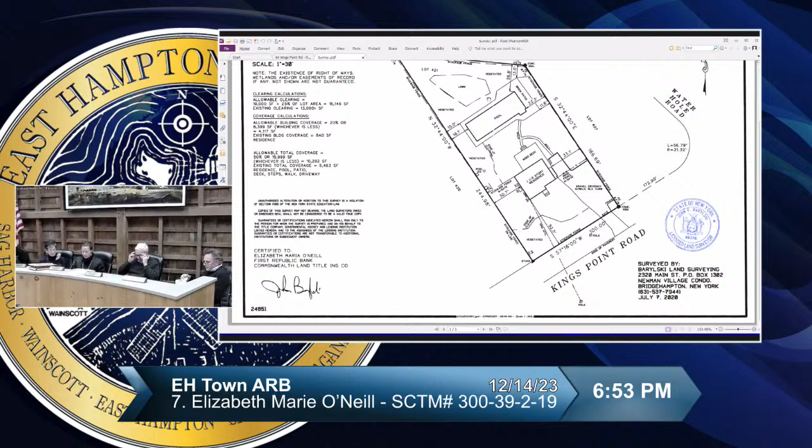Anthony Ammirato, certificate of occupancy. Anthony Ammirato, tax map number 300-95-5-7, 16 Cedar Ridge Drive, East Hampton. This is yours, Frank, also. Okay, so let's bring up the photographs.

We're gonna have a similar situation, hopefully this one is easier. So this is an application for a certificate of occupancy for a property on Cedar Ridge Drive in Springs, off of Springs Fireplace Road, about 200 yards. So the resolution, let's just go through the process. There's a driveway gate facing the street. This is, I will say, a very well tended lot.

The resolution says the driveway gate, height of existing cedar wood gate and post, shall be no greater than 5 feet. Every other horizontal panel is to be removed while maintaining the existing top and bottom panels. The top of those posts conforms to the 5-foot road rule, so my reading of this resolution is that this is conforming.

Let's go to the rest. It says deer fencing, to the right. It says existing deer fencing and stockade fencing located on 3 sides of the residence, not to exceed 6 feet in height. We'll have to talk about the language of that. The deer fencing tucked into the shrubbery on the front side of the residence is also not to exceed 6 feet. So basically the survey is showing 6 feet of fencing around the property, but the front is not on the property line.

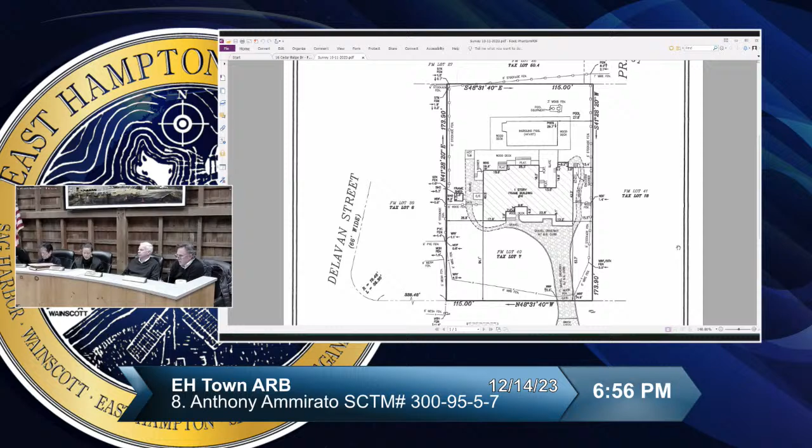So there are also, bottom line, the fencing around the property, the deer fencing and the stockade fencing conform to as-of-right and the resolution. There are a couple of fences to the right because it's a pool, they have to have a fence to enclose it, though a deer fence doesn't qualify. This one is a deer fence. If you zoom into the right, you'll see fences on either side turning into the house.

Okay, those two sections, I'm going to have to show you this. Just give me a second. Bring this out, and then I'll show you. Essentially, they're not stockade fences, they are at 5 feet 5 inches. So they are neither stockade nor deer. They look like this, a board fence, and they do not exceed 6 feet in height. But they're also basically in the backyard, no? Right, so what's going on?

I just want to make sure, in terms of the resolution, that these were not listed—it appears they were built as of right. It's not listed in the resolution, but I think that's fine. It appears to be built as of right. It's fine. So I believe that this property is in conformance. Okay, good.

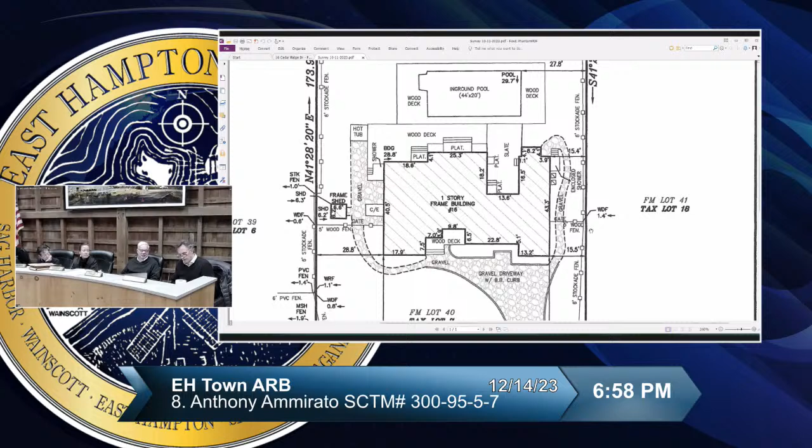I make a motion to approve this application for a request for a certificate of occupancy, and instruct staff to notify the building department that this is ready for a certificate of occupancy. Do I have a second? Second. All in favor? Aye.

Thank you. All right, resolutions: 374 Main Street, tax map number 300-171-5-4, Drucker Residence, tax map number 300-62-7-2.4, Montauk Sunset Cottages, tax map number 300-20-2-13.1 and 13.2, 404 Montauk Highway, tax map number 300-189-1-6.1, 50 Northwest LLC, tax map number 300-91-1-20.3, and Matthew Wallier, tax map number 300-63-6-3. And that is it for the evening.